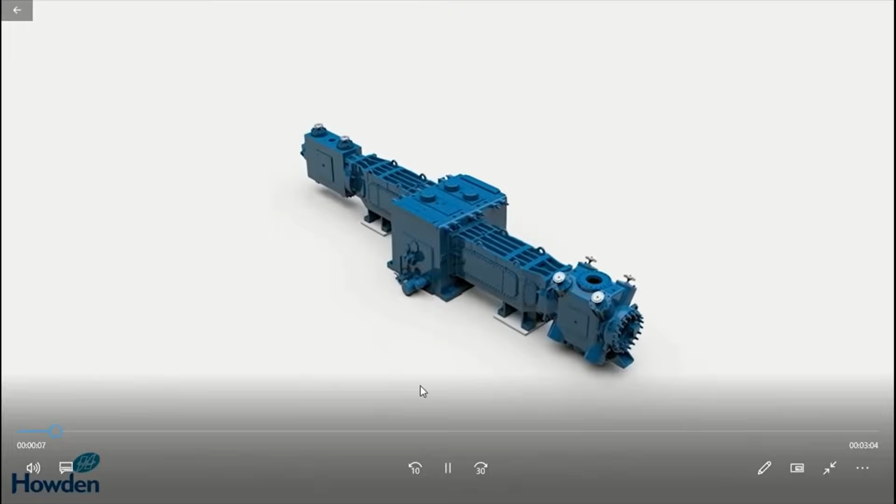So we'll try to understand the internal components of a double stage double acting reciprocating compressor, as well as how the components perform their function and how air or gas is sucked in the compressor through valves and finally discharged to a higher pressure. So let us see through a Howden C series gas compressor. This is a C series compressor of Messrs Howden. So let us see the moving parts and internal components of this compressor.

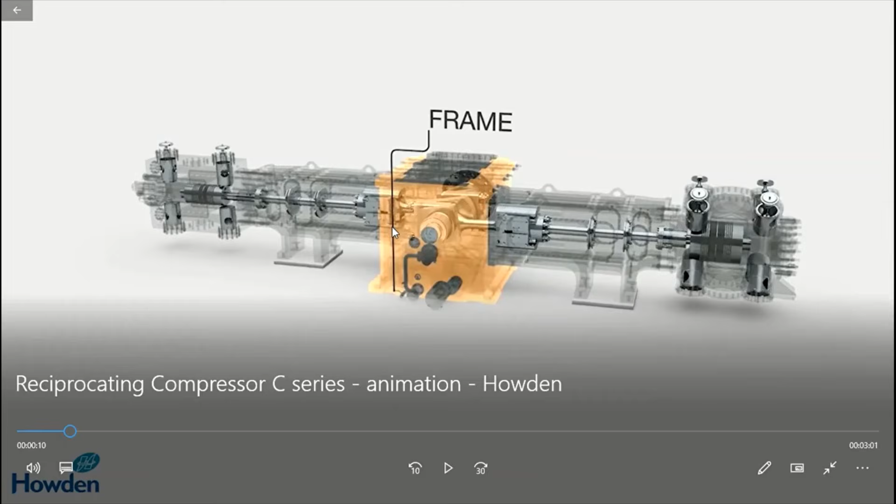The yellow portion shown is a crankcase. Here you can see this is crankcase and this is crankshaft. Here oil pump is installed for lubrication of main bearings as well as big end bearing and small end bearing. That is a forced lubrication. Oil is stored in a crankcase chamber. At this end oil pump is installed and at the other end of this crankshaft a flywheel is installed, which is rotated through a prime mover. The prime mover may be an electric motor or a diesel engine.

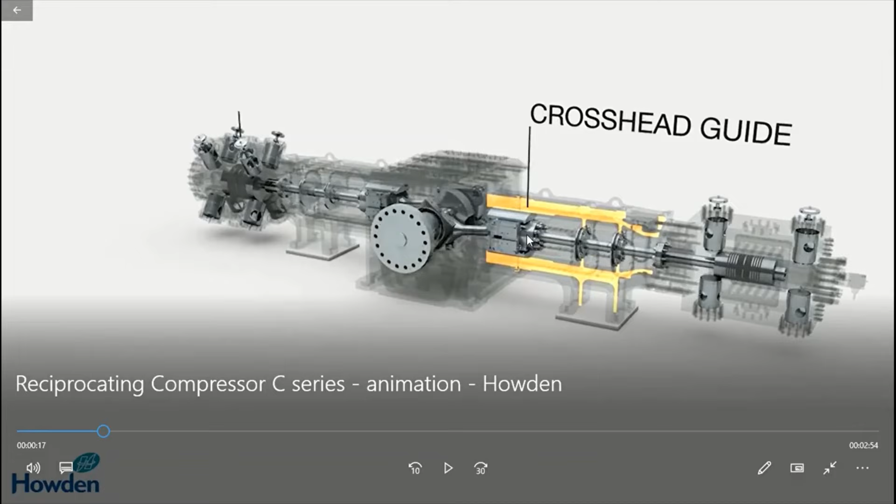Now you can see this is a crosshead. This component is a crosshead and this connects the connecting rod and piston rod to each other. The oscillating motion of a connecting rod is transferred to a to and fro, reciprocating motion through this crosshead. You can see the yellow portion shown is the LP cylinder, low pressure cylinder. The air or gas is sucked in the low pressure cylinder first, pressurized and discharged to second stage suction.

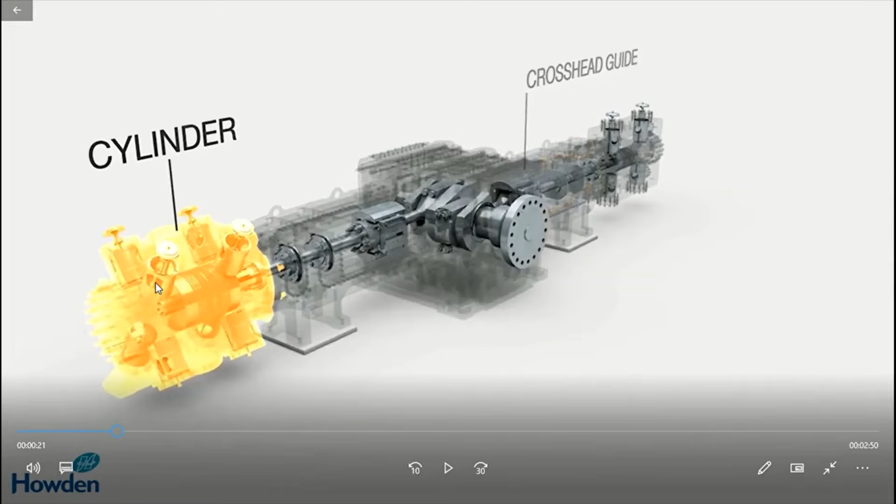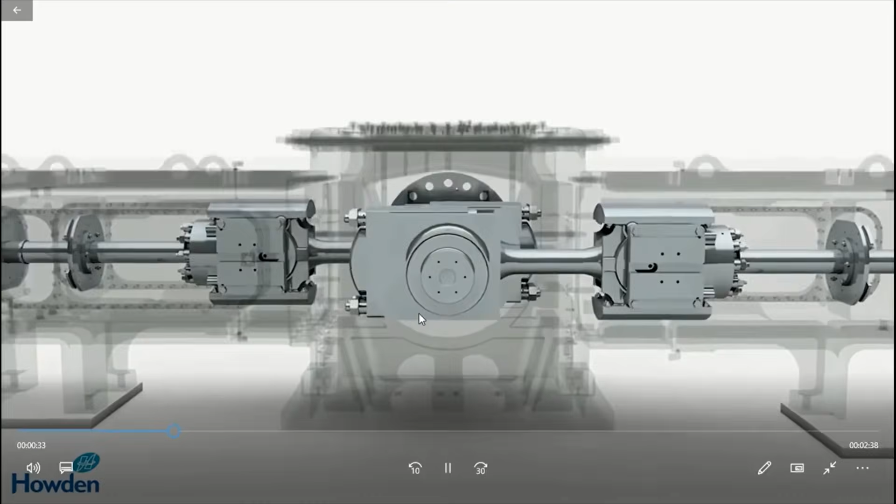You can see here a rotating crankshaft. The yellow portion shown is a crankshaft. The two bearings are shown. These are two main bearings of this compressor. The crankshaft is supported on these bearings. The bearings are force lubricated. Journal bearings are provided which are white metal lined.

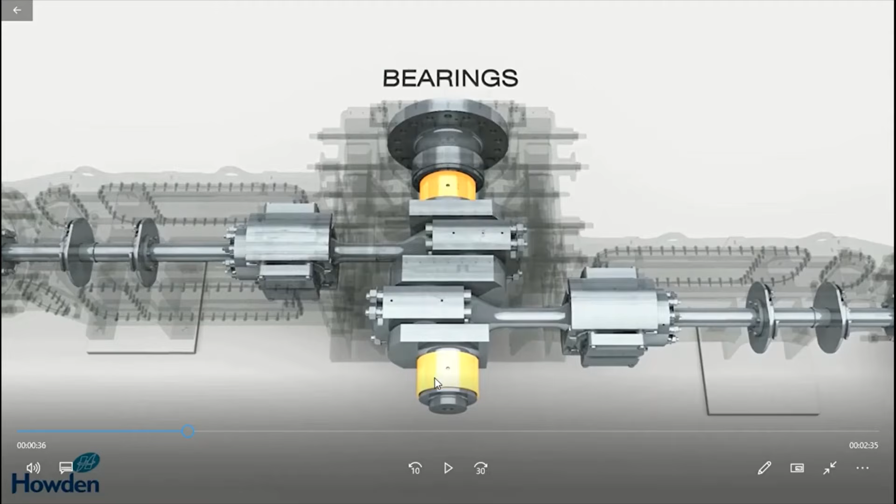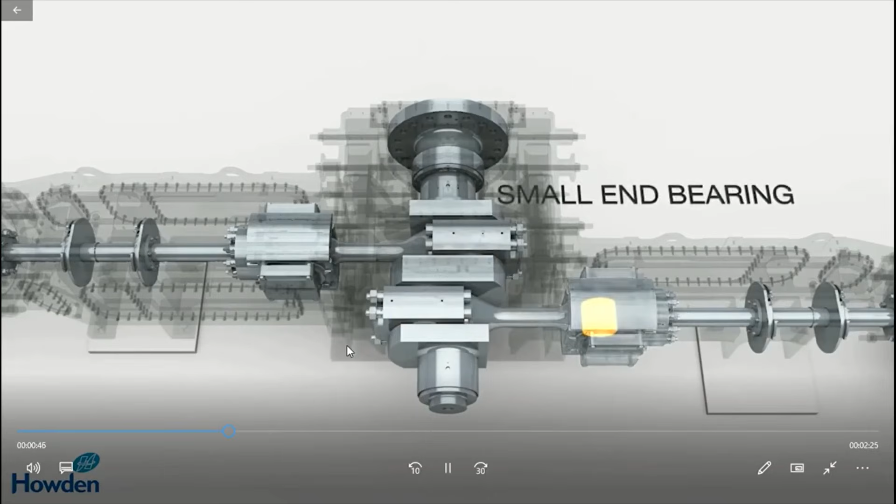These two yellow portions are shown. This is a big end bearing. This connecting rod is connected with the crankshaft through the big end bearing. This is a small end bearing. In the crosshead guide, the connecting rod is connected with the crosshead with a small end bearing. This is an adjustable crosshead shoe. They can be replaced after wear and tear.

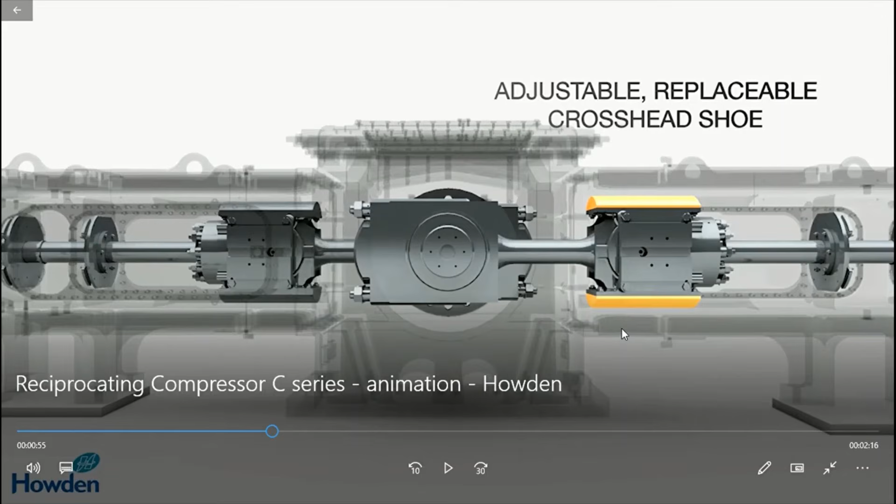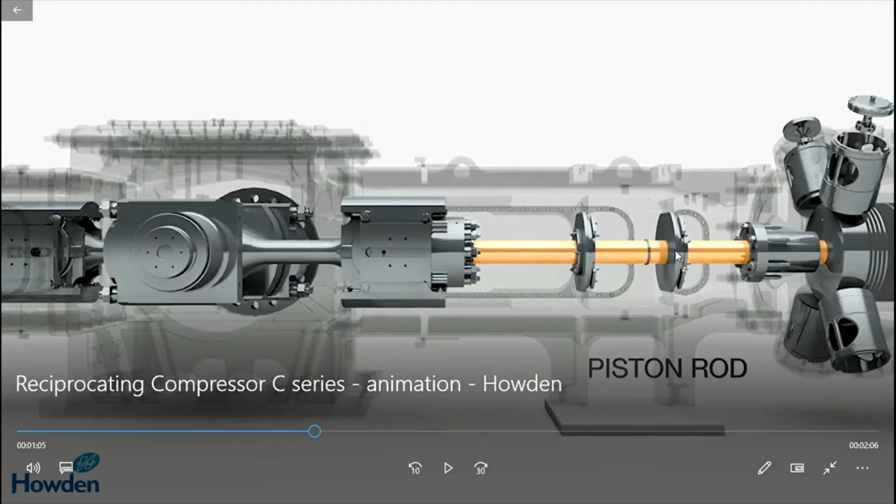This is a connecting rod. This is crosshead and this is piston rod. The yellow portion shown is a piston rod; one end is connected with the crosshead, the other end is connected with a piston. Here it is a stuffing box. Gland packings are provided inside of it. And here oil wiper rings are provided to prevent leakage from crankcase to atmosphere. This is oil wiper packing. Tangential cut, radial cut oil wiper packings are provided.

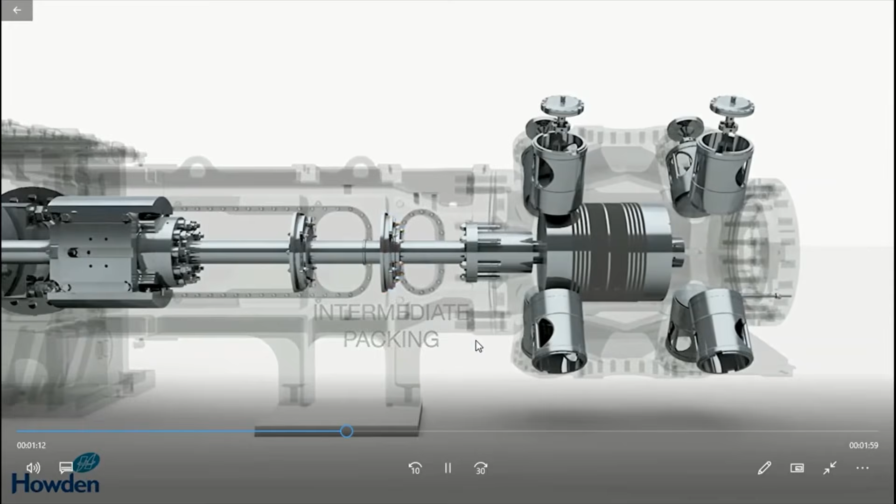This is a stuffing box. Inside of this, gland packings are provided to prevent leakage of pressurized air along the piston rod to atmosphere. Now you can see inside of this there are gland packings 1, 2, 3, 4, 5. A set of gland packing consisting of 5 gland packings is provided. These packings are generally of pure Teflon.

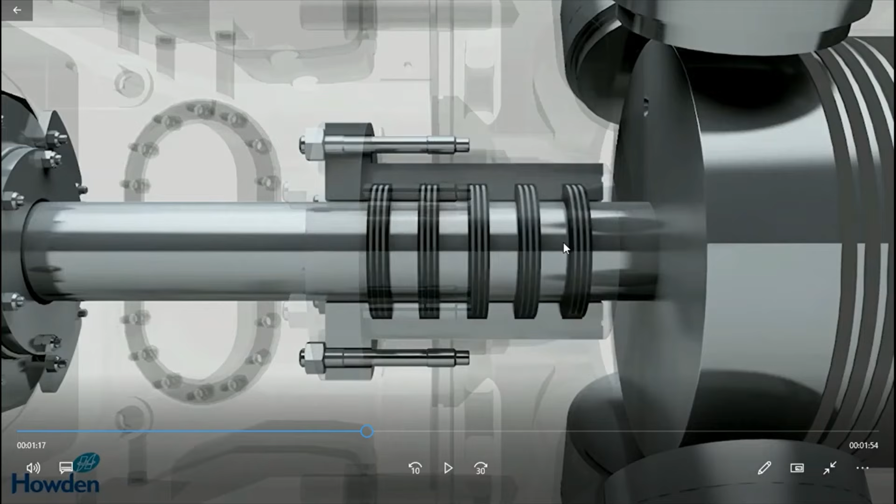So why is pure Teflon used? Because they will not give any indentation or scratch on the piston rod. If we use hard material packing, then they can make indentation or scores over the piston rod, and that may be a path of leakage along the piston rod. So therefore, soft packings are provided. Sometimes the innermost and outermost packing is provided of Teflon, and the internal 3 rings are provided of graphite, which is a very soft material.

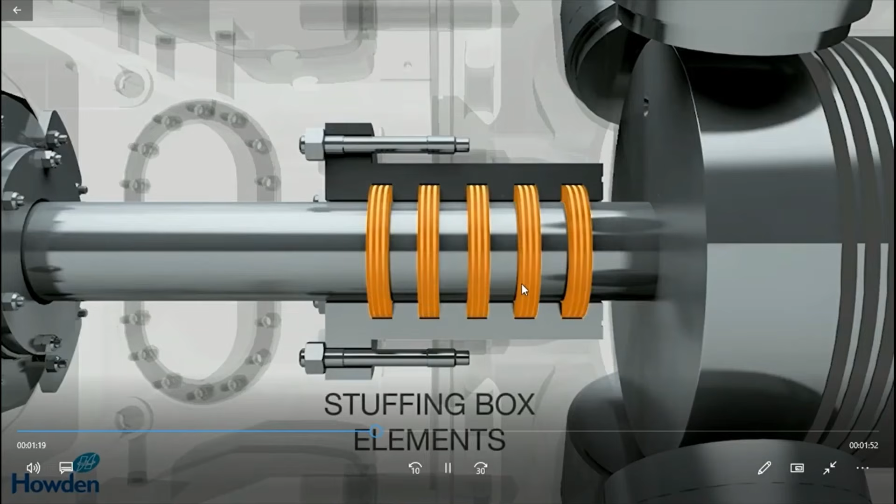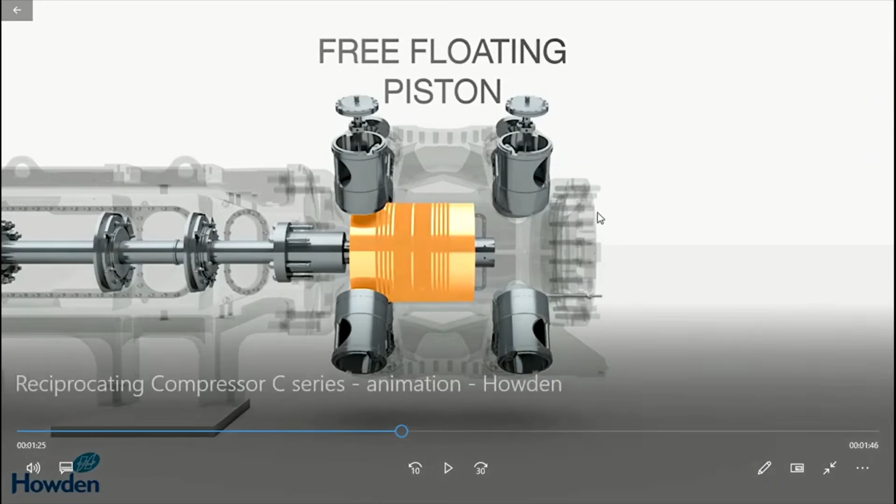Now you can see this is a free floating piston. The yellow color is shown on the piston. This piston moves to and fro. The top side of this piston is called top dead center, and crank side is called bottom dead center. A clearance is provided on the top dead center and bottom dead center to provide space for compression of gases and expansion clearance. These two top side valves are provided. These two are suction valves, and these two discs which you are looking at are the unloader assembly, and these bottom side two valves are delivery valves.

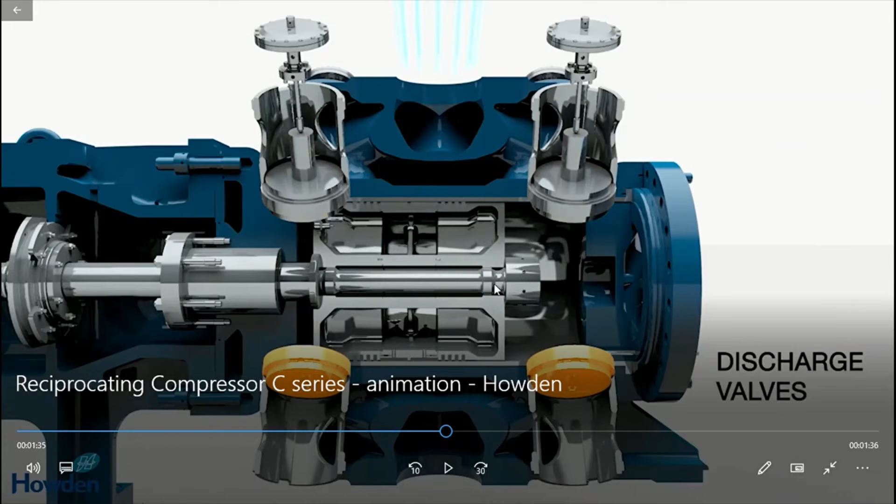Now you can see how air is sucked on either side of the piston. When the piston moves this side, the suction will start, and when the piston moves towards the crank side, the suction will start from this valve. Air will enter, and then in the next stroke it will be compressed and delivered through the discharge valve. You can see here the air is coming inside of the cylinder through the suction valve, and in the opposite stroke it will get compressed and discharged. So you can see here it is getting discharged through a delivery valve.

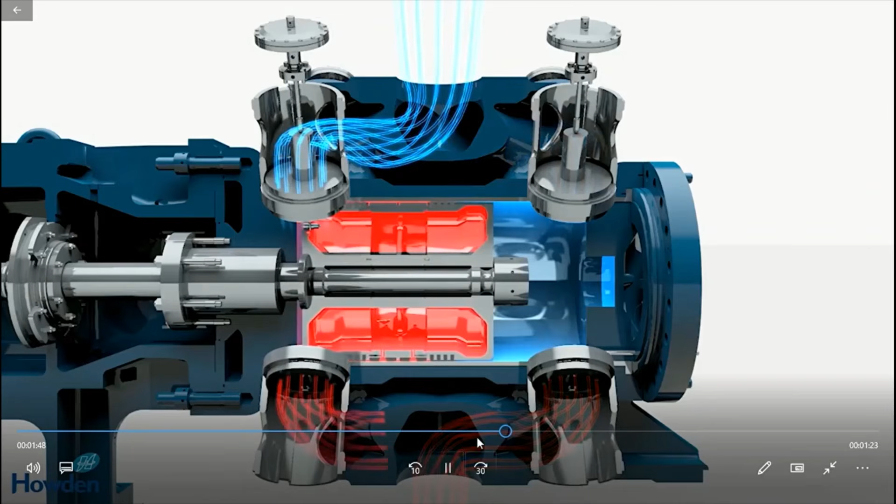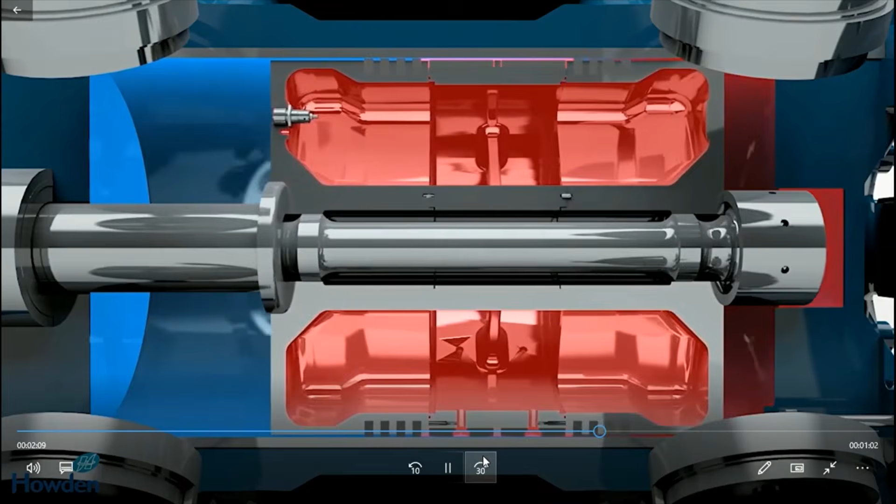So how the double stage double acting reciprocating compressor works in this demo is shown for your knowledge. These compressors are generally horizontal axis and balanced opposed, because the moments produced by the moving pistons are opposed by each other.

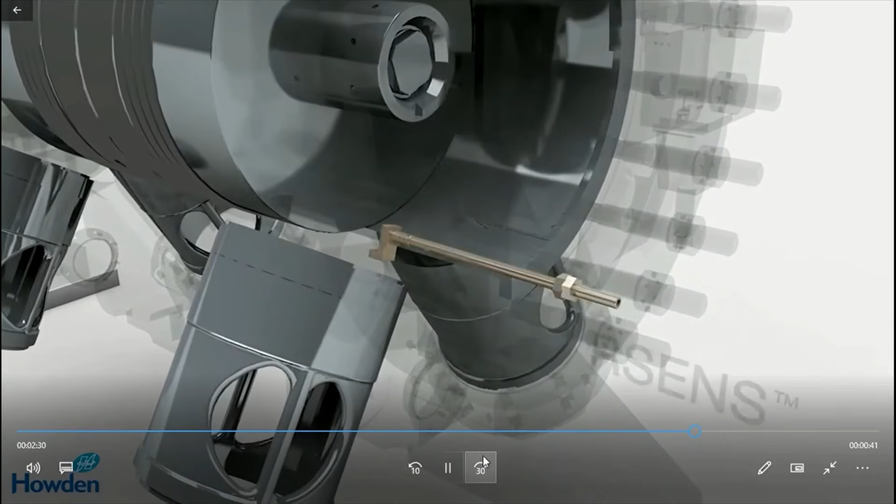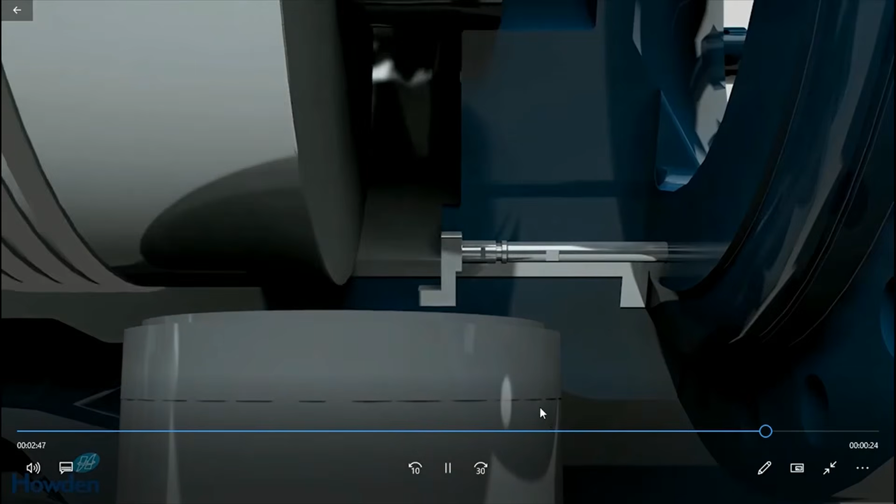So this is all about this reciprocating compressor, and now you can see inside of this a clearance space is provided, so this piston will not touch this end cover of the cylinder. This is all about the compressor.